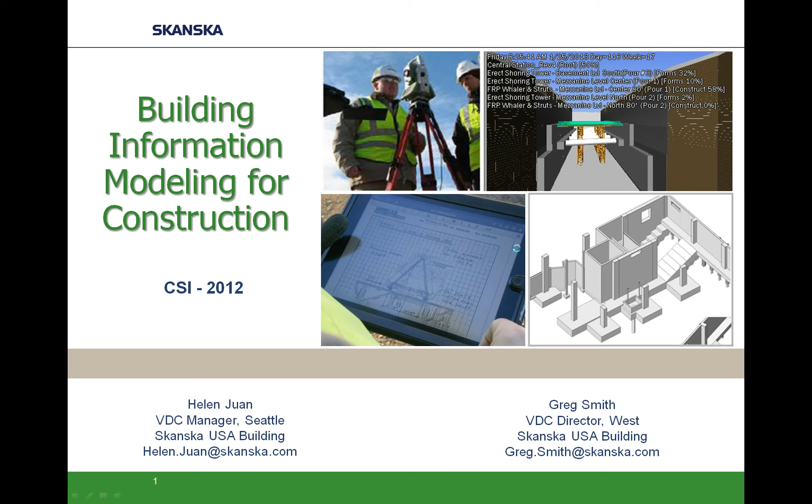Skanska USA is in a variety of different markets, including healthcare, aviation, institutions like universities. We do a lot of small and large construction projects. In the USA, we have about 5,000 employees. Worldwide, Skanska has about 55,000 employees. One of the big challenges for Skanska related to BIM is making it ubiquitous across the entire country, rather than just having pockets of excellence in certain offices. Next slide, please.

In this presentation, there's about 60 slides, other than the agenda, and we'll try to go through those as rapidly as possible and get to any questions. So this is the agenda. We're going to talk a little bit about planning and construction, and then the information as well. One of the lowest hanging fruits for BIM, for us anyway, is visual communication. We do logistics planning on every one of our projects. The more we can communicate in 3D, it just helps the entire team see what's going on in the construction project, rather than trying to flip through 2D documents. So next slide.

This is another example of 3D logistics plans. Looking at that is a great visual communication of what's going to happen on the project. And we don't just share this with our internal team - we can share this with the owner, and we can also share it on a website or some other way so that the public can see what's happening as well. So next slide.

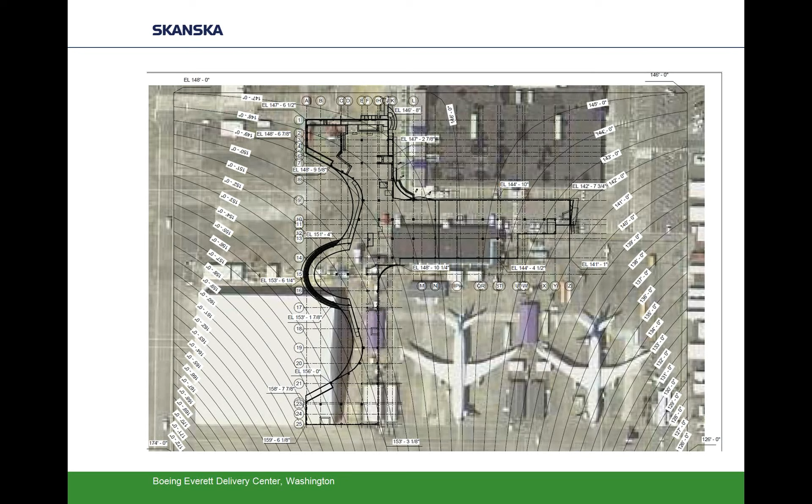In this example, this is a unique case where we had an FAA ceiling. This is the Boeing Everett Delivery Center for the 787, and they were only given 4 points of elevation at the 4 corners of the site. So trying to communicate the maximum crane height operating limits was conveyed through this contour map, but we also showed the ceiling in this elevation view, so they had an idea that it was a plane twisted in 2 directions.

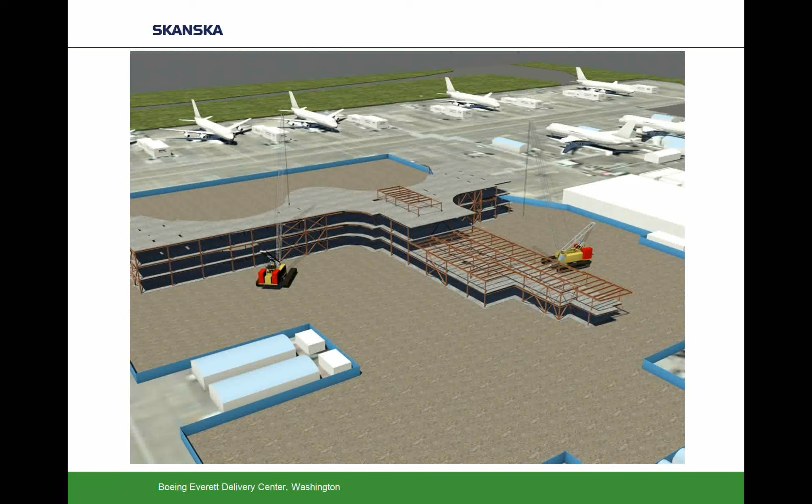We also use the models a lot for virtual mock-ups. In that same project, we were showing how we were going to execute this project from 2 different sides. It was a fast-track project, showing where the FOD barriers were, the crane locations, and how the sequencing would go with the steel and the concrete.

Go ahead. Sure, go ahead. I was just going to say, you can click to show the next thing.

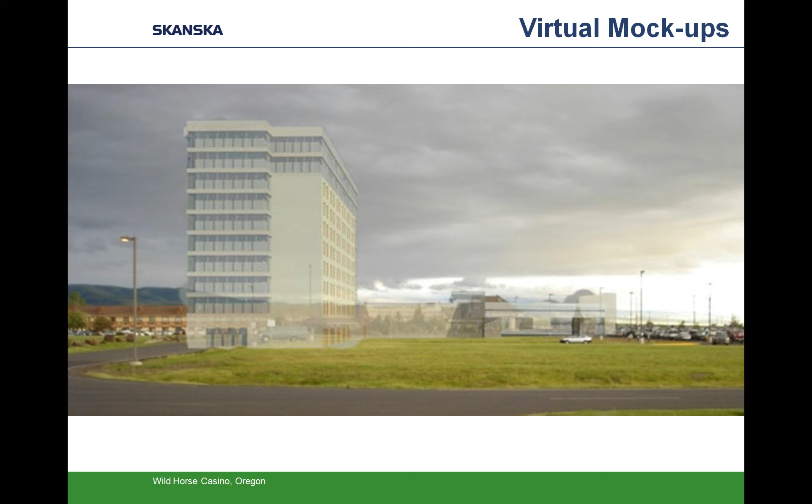Go ahead, Helen, next slide. Here's an example of where you see, on the left upper corner, there's a 2D plan.

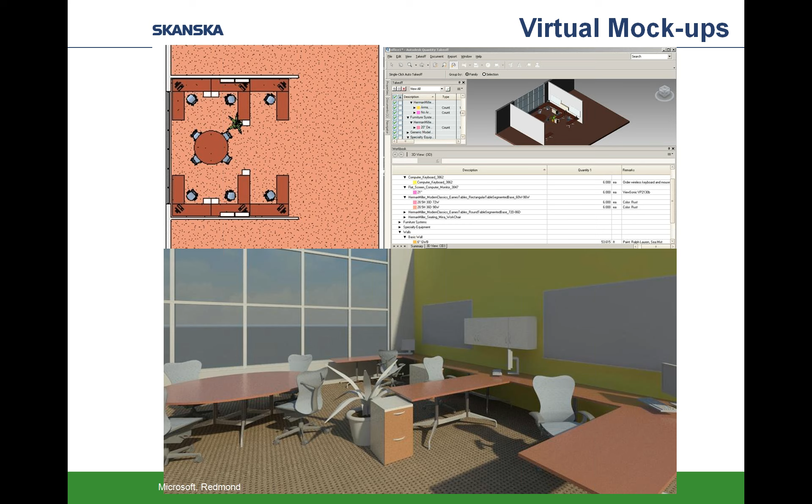Okay, there's a 2D plan of the furniture, but it doesn't really give you a good idea of what the layout is from a user's perspective. So below is the 3D representation, and we also use this for a lot of our healthcare facilities. When we're mocking up the interior for patient rooms, there's a lot of valuable space in the walls, and the doctors and nurses have very particular needs for how all their in-wall equipment is located.

Here's another example of a healthcare facility with the patient beds layout and the scanner. We could add even colors and textures to it, so the staff completely have a good idea of what's going in and what they'll be receiving from the facility.

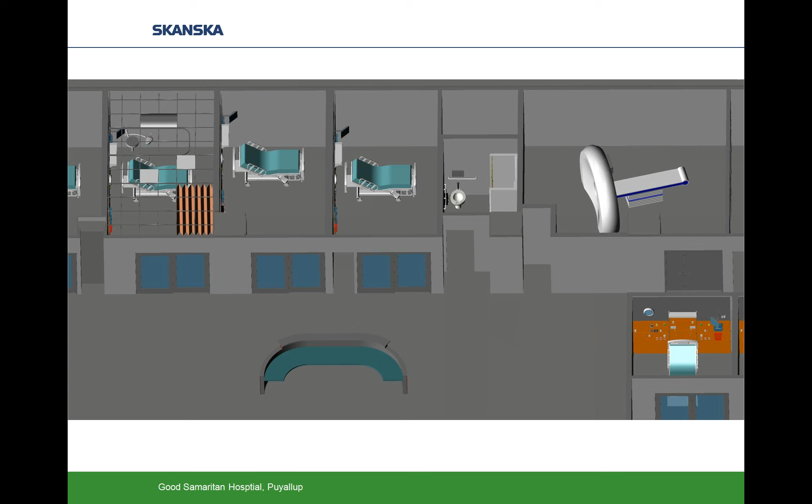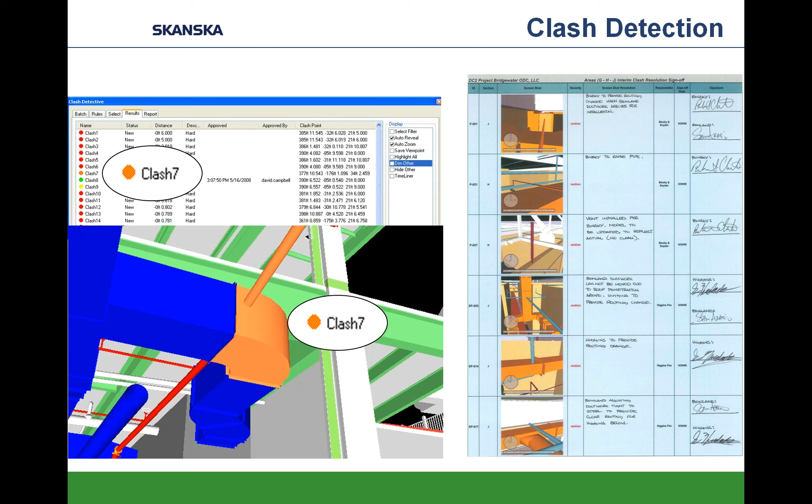Here's an example of a coordinated view with consolidated models, and then an in-progress construction view. We try to take the model on field computers or iPads and use that as a quality assurance type of tool, actually walking the systems and making sure that what was coordinated is what's actually put into place.

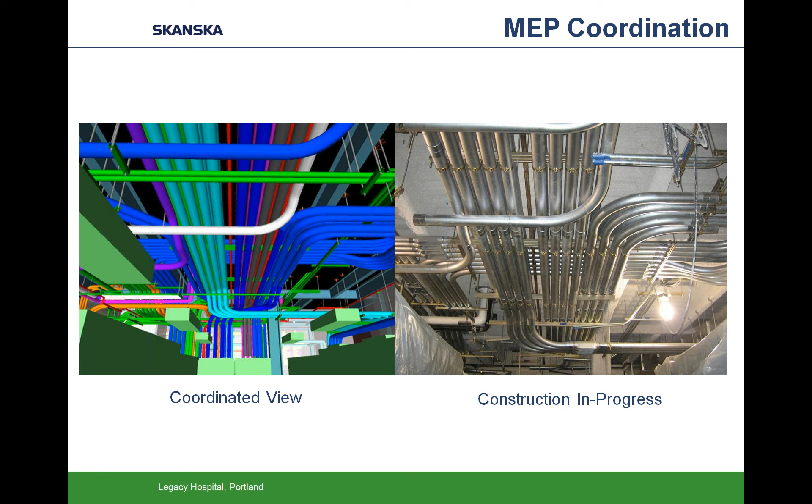In this example, this was a model that we created in preconstruction for the University of Washington Medical Center. There's a lot of existing utilities, and in this model we communicated how the areas of influence from trenching for the new lines and pouring the new piles was going to affect the existing structure.

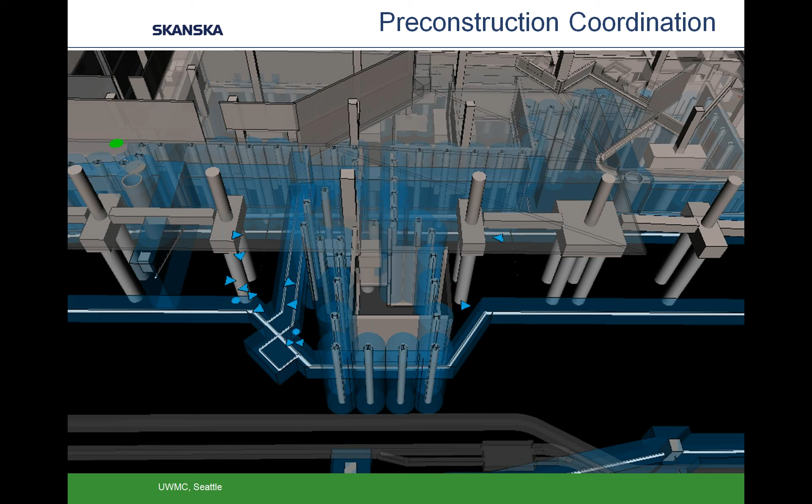Greg, do you have any more insight on this one? I know you worked extensively after I modeled this. Yeah, it was just a good example of where the designers were kind of working in silos, and until we brought it all into a model and showed them how the foundation information was going to clash with the utilities, it really sparked a lot of discussion, and we were able to resolve a lot of things early in the process.

I'll take this slide as well, Helen. This is actually off one of the projects we did several years ago, and nobody at the time wanted to do MEP coordination.

If you look at the drawings, it looks fine in plan view, but in elevation view you can see the equipment is sitting outside the roof. This wasn't caught until we started trying to install the equipment, and everybody realized there was a problem. It would have cost a very minimal amount of money to do the MEP coordination up front, although nobody wanted to do it. But in the end, it jeopardized the schedule and cost quite a bit for the change.

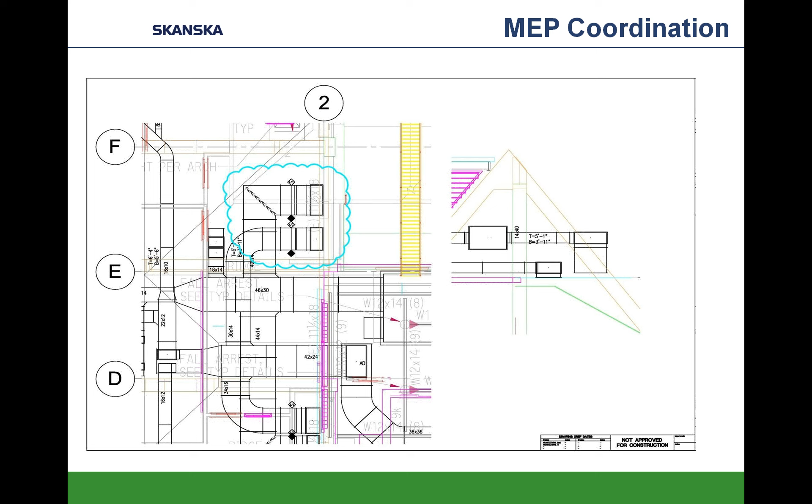Next slide. We also use BIM for safety planning, and in this example we're pointing out some of the temporary structures that were put into place for safety measures—railings and fencings. Sometimes we'll highlight leading edge where there's going to be hot work above.

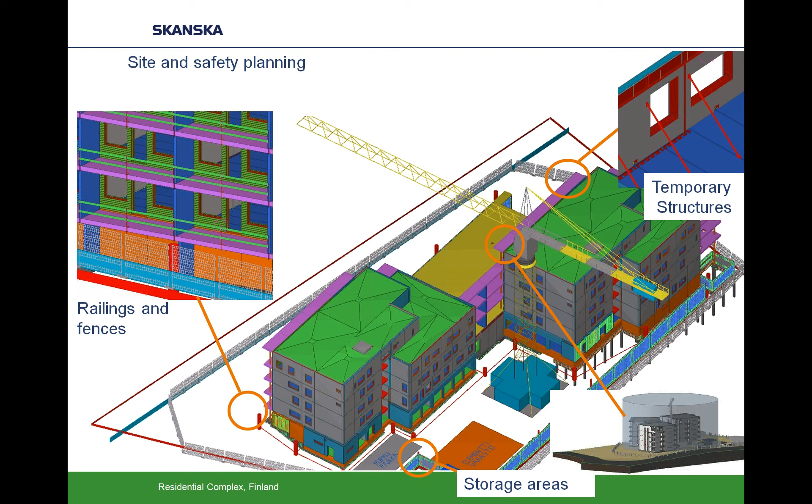So the model could be used in a variety of ways, depending on who's your audience. We tend to sometimes forget about those temporary structures, but they really have a huge importance during the progress of construction. We've gotten into a habit now of creating a schedule of the plans and lift drawings that we intend to create from the models, so that we can stay ahead of the work and stay ahead of any safety concerns.

The models could really be used for ensuring safety throughout the life cycle of a project. As you see from this picture, there's many valves in the structure that aren't accessible except through a scissor lift, whereas you could have easily designed a catwalk to access all this equipment. Over the course of the lifetime of a project, consider the cost of the hazards you're imposing on personnel, the time lost just obtaining the scissor lift and putting it in the right place. There are productivity efficiencies there, versus a one-time install of some permanent infrastructure that can safely allow maintainers to access all the systems.

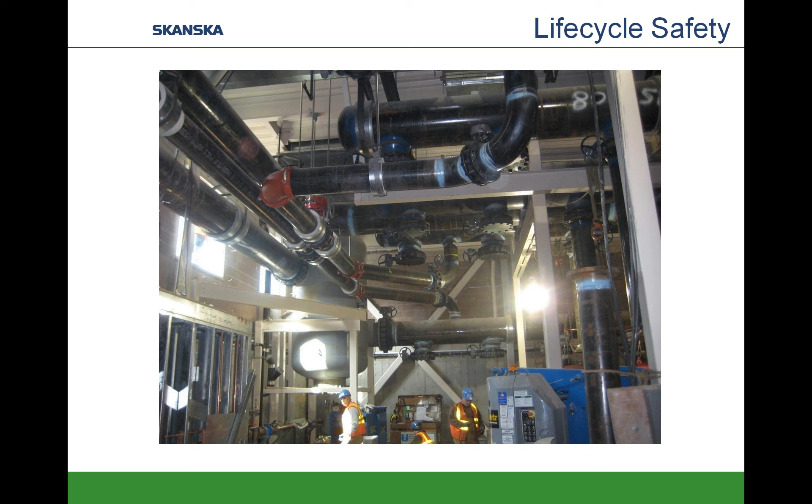So a big part of lifecycle safety isn't just making it safe to construct, but making it safe to operate as well.

We have some techniques by having superintendents work with the model, and they're able to think of ways where there's safer means and methods of construction. On the Good Samaritan project, we're looking at the embeds in some beams. The floor to floor height is 15 or 20 feet, so there's a lot of interstitial space.

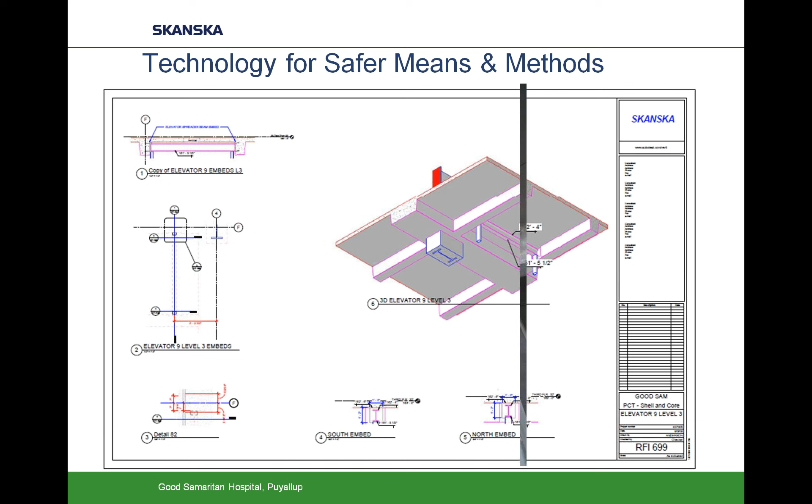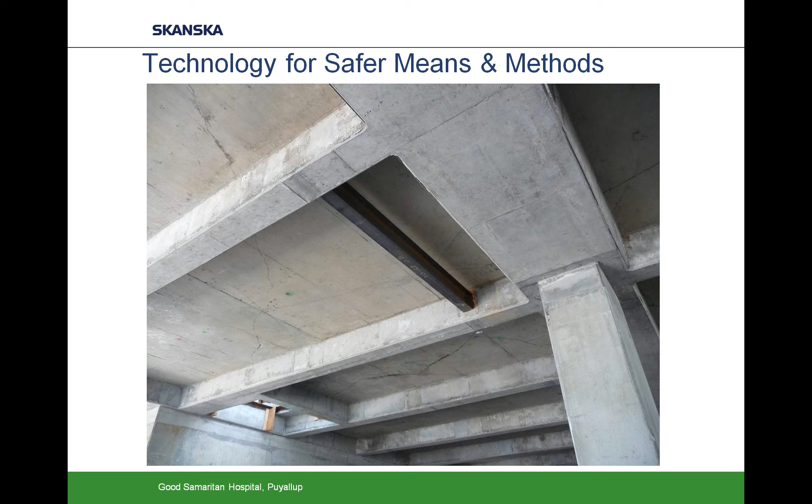Working with the superintendents, they're able to tell us what methods we could use to install the embeds at the floor level before we cast the beams, and then raise it all up. In this example, we really saved time for the steel workers and also improved safety by having that beam welded to the embed prior to it being lifted into place and the concrete poured.

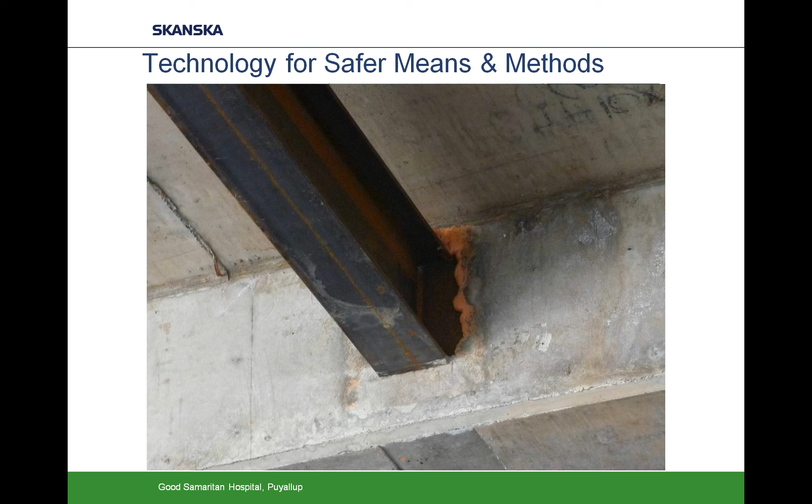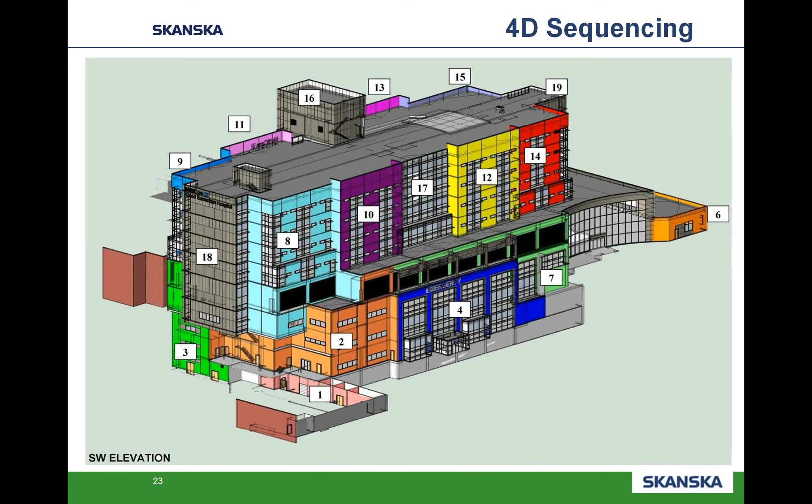I'm sure a lot of people have probably seen a 4D simulation, but it's just tying the schedule to the elements within the model and then creating a little movie. Go ahead, next slide.

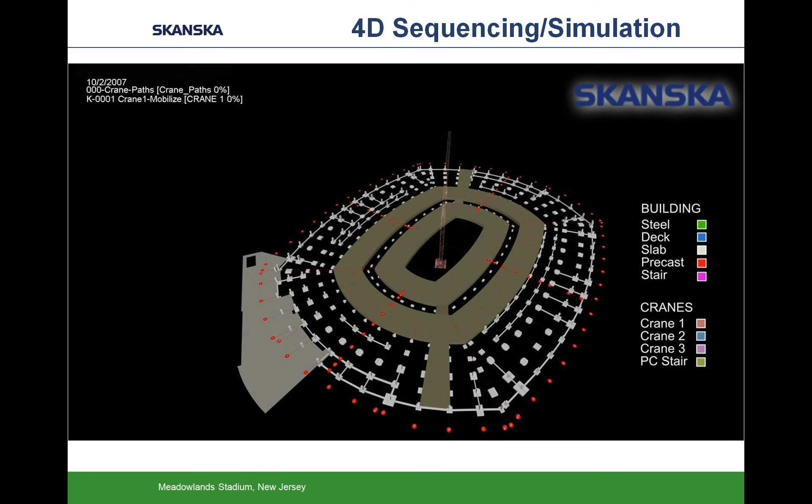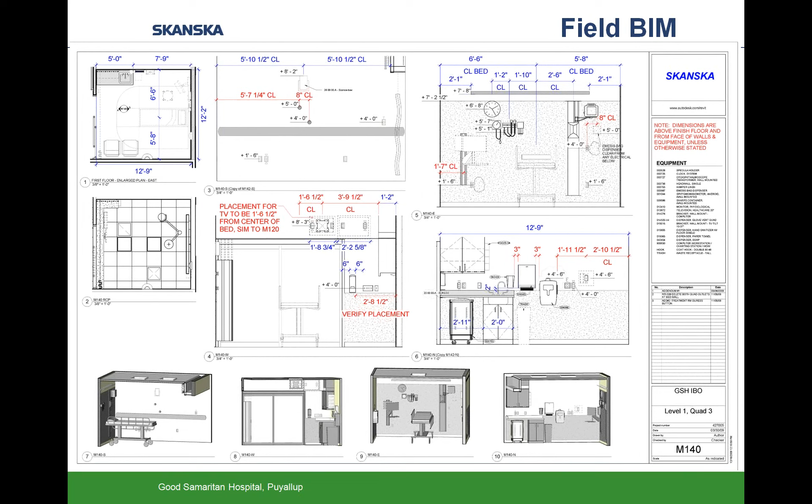This gave views from the ceiling, floor, each of the walls, and then isometric views for each of the patient rooms.

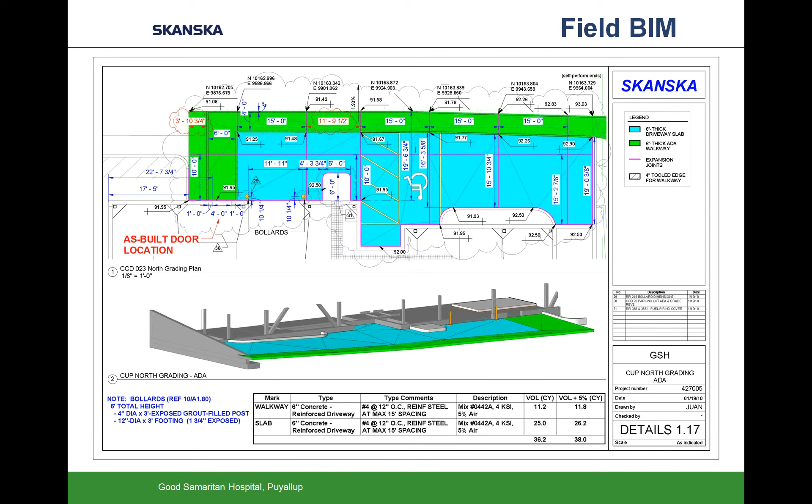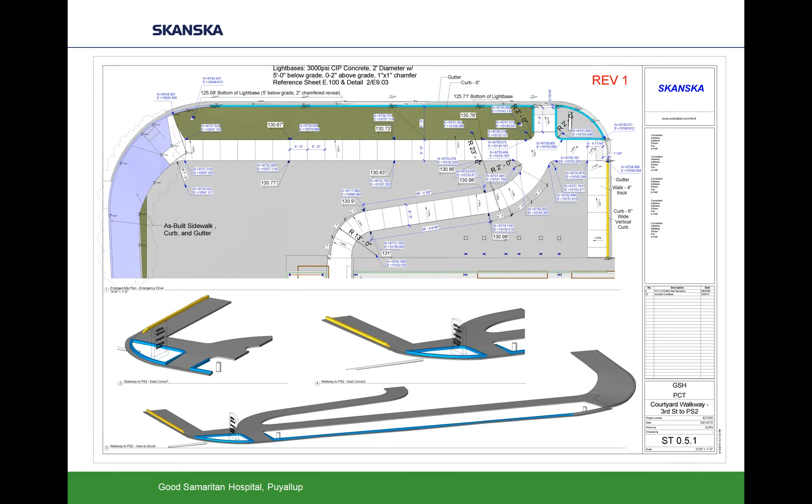This is just an output from the software, so that we can take a robotic layout and easily shoot it in.

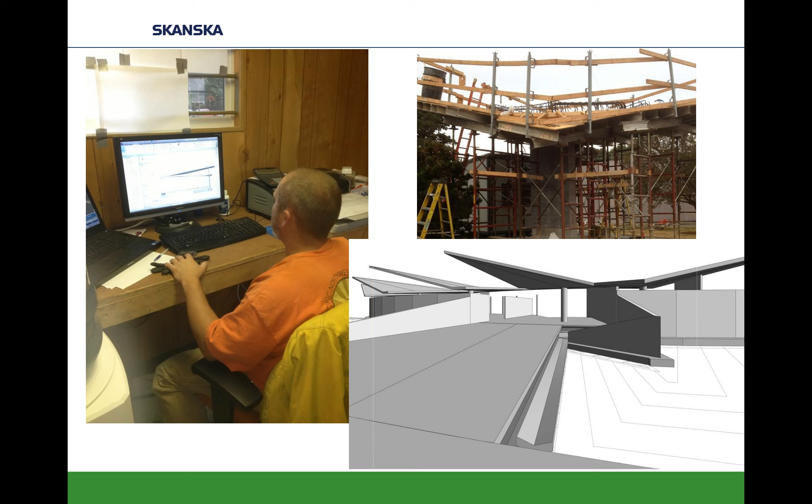When we got the drawings from the engineer, they did not show the rebar bent at all—it was shown bent at a 90-degree angle, but based on the slope of the roof, we had to bend the rebar in a certain fashion. It's hard to see in the picture, but some of those bars are painted, which helped the field guys orient those columns properly, so that when we pour the roof deck, the rebar isn't sticking out.

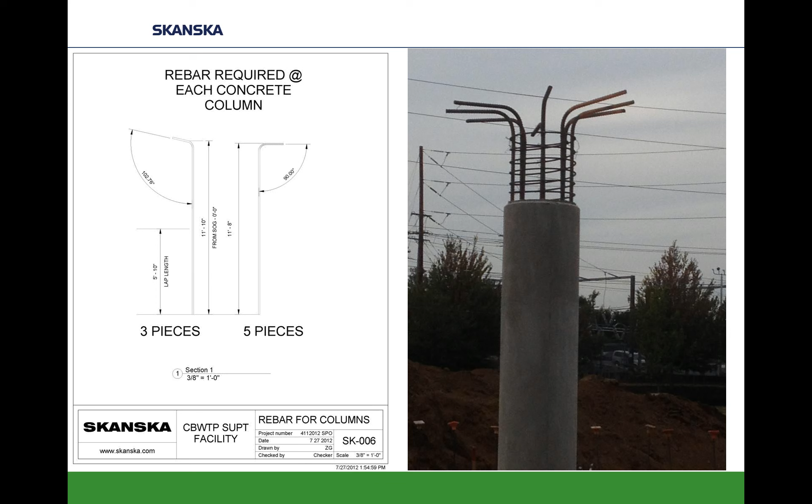Zeke, the superintendent, is very self-sufficient on this project. He's building the model, adding points to it, and then extracting those points to use in a robotic total station to lay out the site.

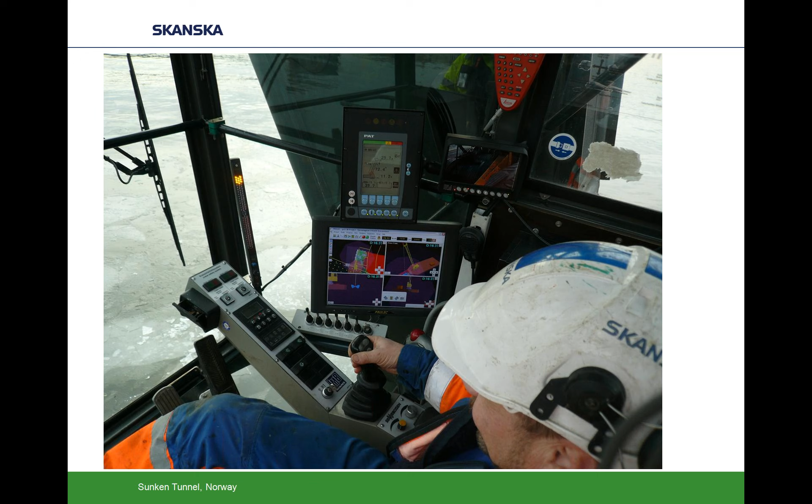This is a bit of a different view—this is actually an excavator, excavating the bottom of a bay. This picture shows the inside of the cab, and the guy is basically playing a video game all day long, watching on his screen how the digger is excavating. So the kids playing video games these days are going to end up being great construction workers.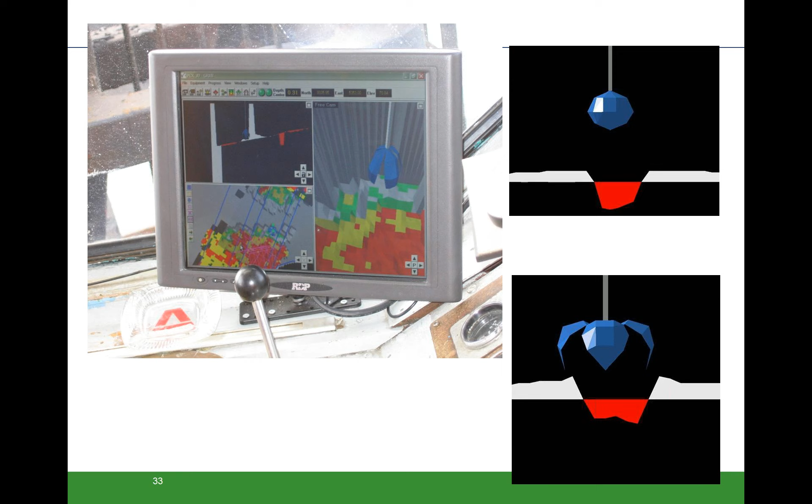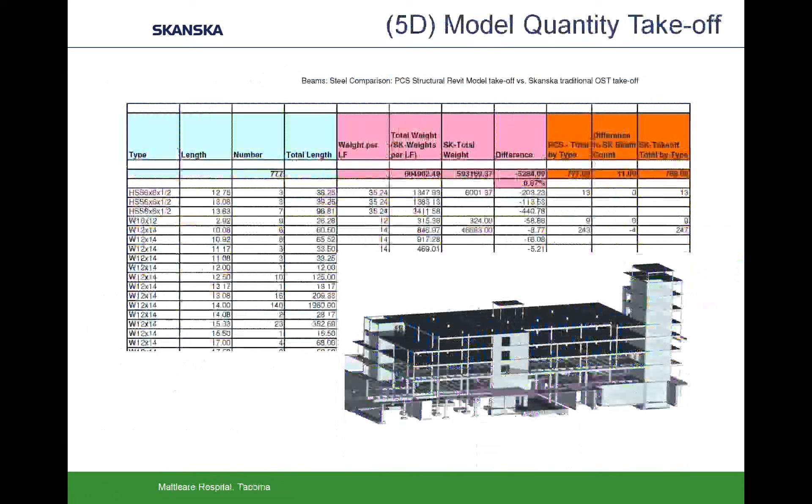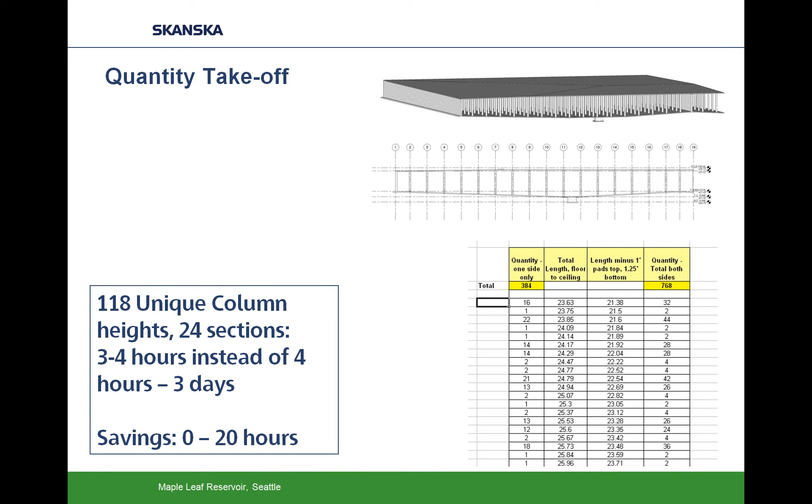We can also use it not just for quantity takeoff, but to figure out how to construct projects. In this example, there were 118 different unique columns, all with very different heights. It's hard to see in this model image, but the roof is sloping in multiple directions, as is the floor slab—this is for a reservoir in Seattle. Our estimators would normally just take one column and average the height across all the different columns, but we were able to build a model very quickly and develop a more accurate estimate.

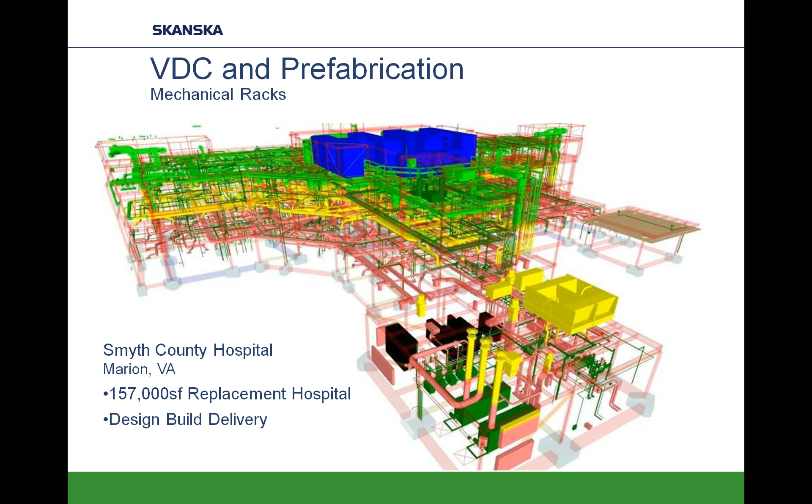So what we start out with is we take a floor plan, and this is for mechanical and electrical racks. We lay out the racks in the corridors to plan where those racks are going to be.

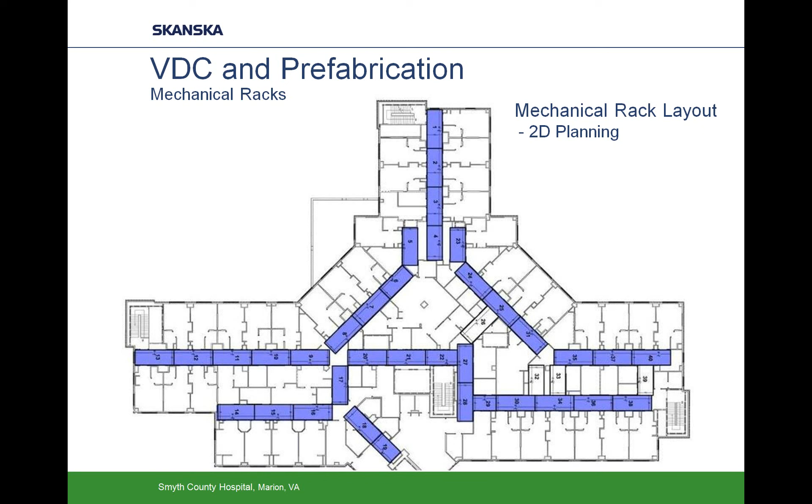This shows how those mechanical racks are going to be laid out. This is after our MEP coordination is done, and we lay out those racks.

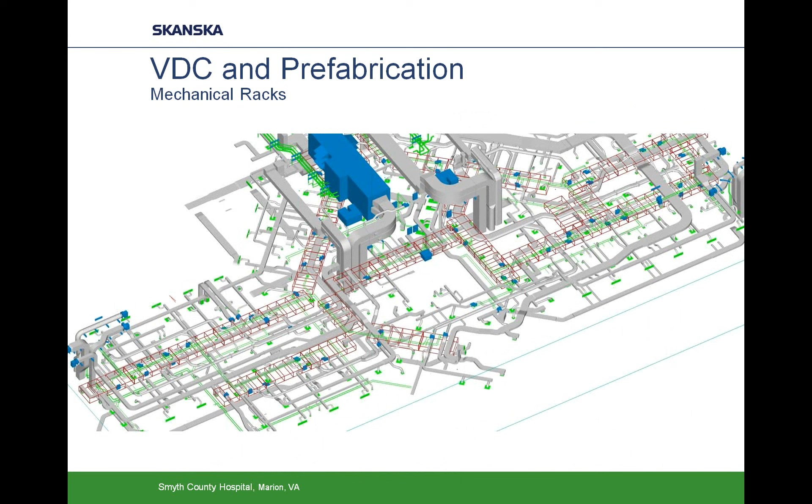One of the things people think about with prefabrication is identical parts. What we do is focus on not just identical parts, but parts that we can identify and detail out to build in a warehouse environment. So we can focus on one of these racks.

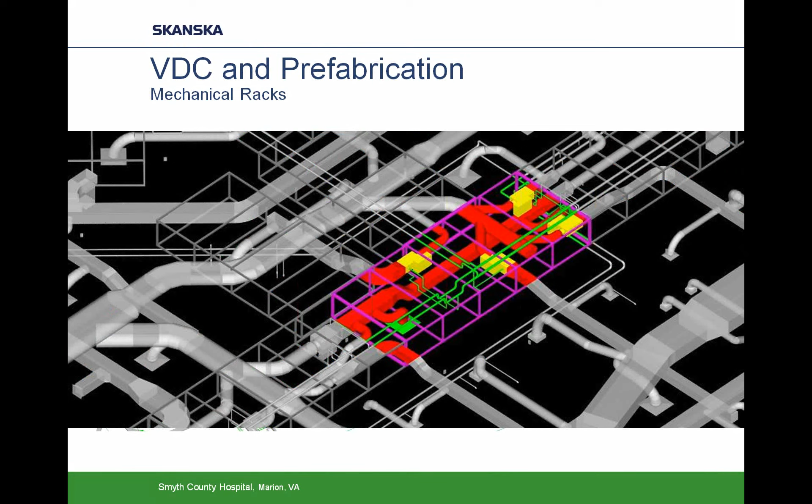We can detail out just that rack, and the models are parametric, so if we change the size of the duct, it's going to change it in our shop drawings as well. If we move something around, it's going to change it in our shop drawings.

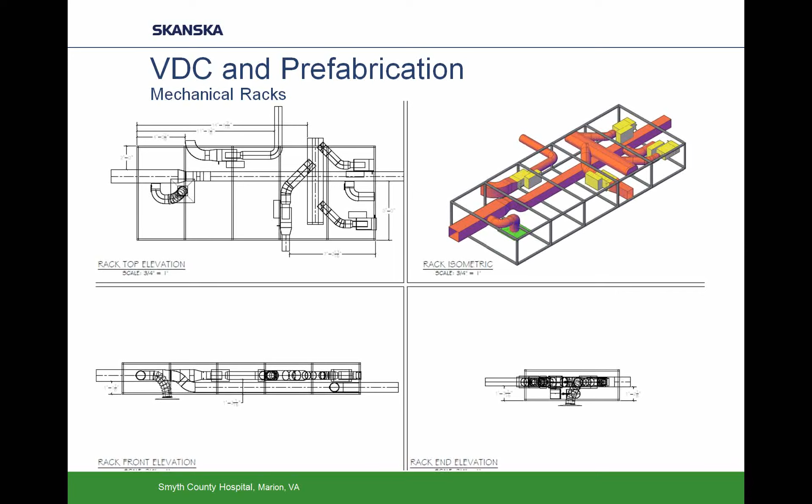This shows the rack after it's been built. One of the things with prefabrication, it really speeds up the schedule, and it also makes it a much safer site. You don't have nearly as many people on site.

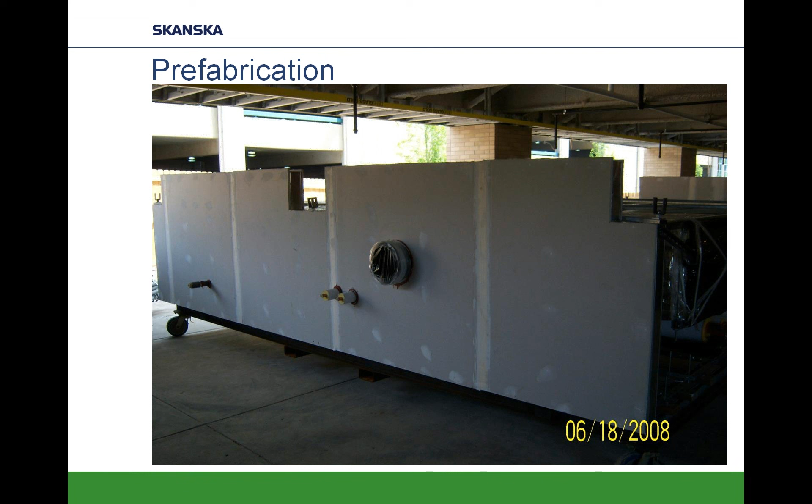Like in this example here, we can attach the partition to the rack before we install it. There's an animation showing this.

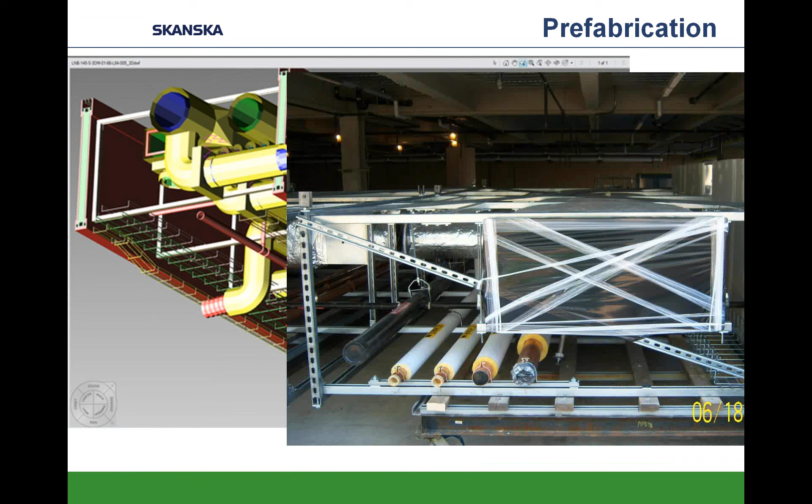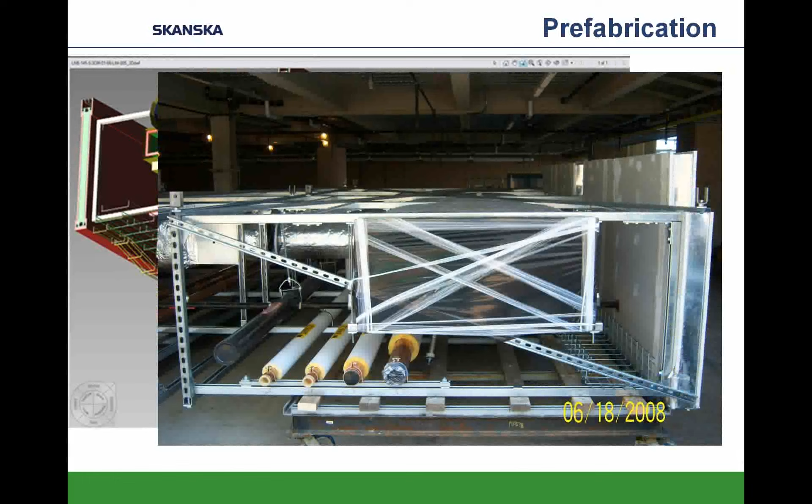That's again showing a detailed model and then how it's being constructed, and then how it's installed. So we wheel the rack into the site, and then we just hoist it up and install it on these tracks on the ceiling. It's a pretty much fully contained unit.

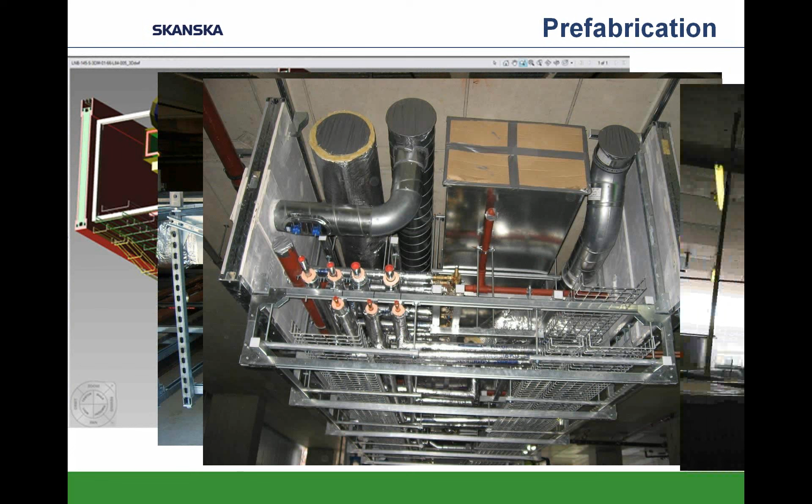And that's showing an entire row of those racks being installed.

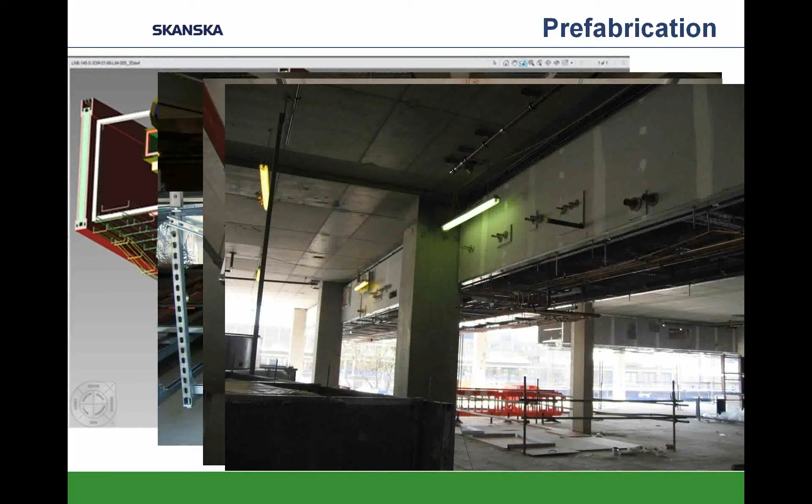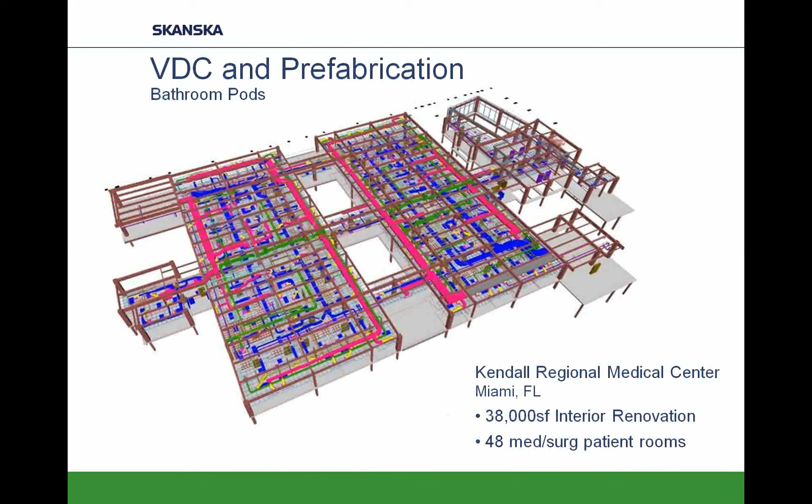This is another project, Kendall Regional Medical Center in Florida, and we prefabricate bathroom pods instead of the mechanical racks.

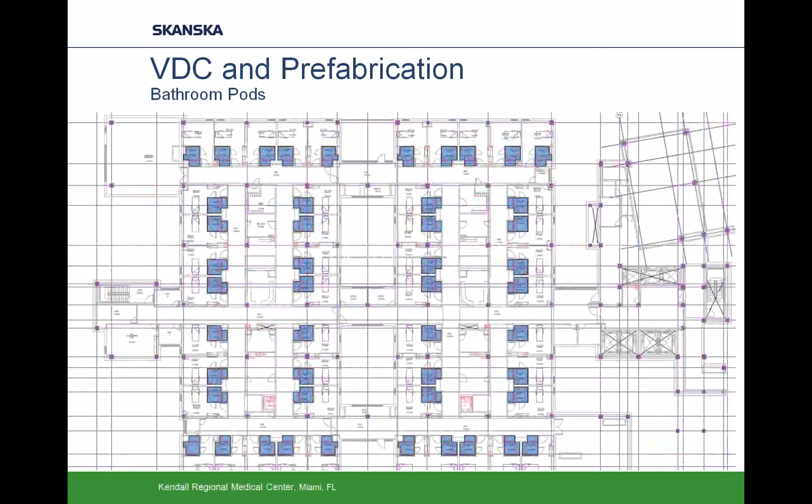So again, we lay out those bathroom pods, and in this example, the pods are fairly similar. Where the mechanical racks are all different, these are mostly similar.

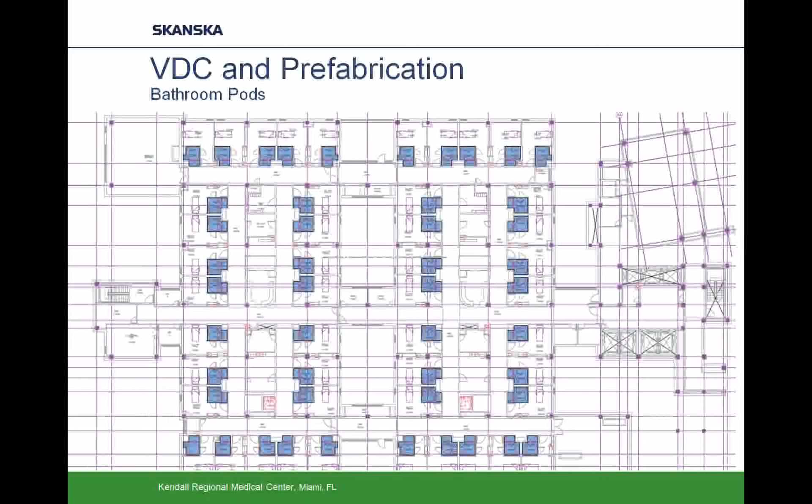We can show, down to the studs and all the mechanical and electrical equipment. We detail it out in 3D.

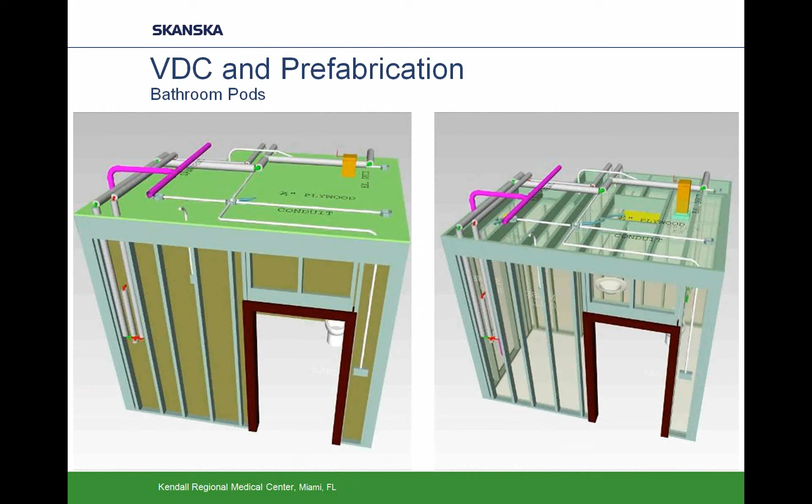And showing those 3D bathroom pods again on the floor plan and in a model.

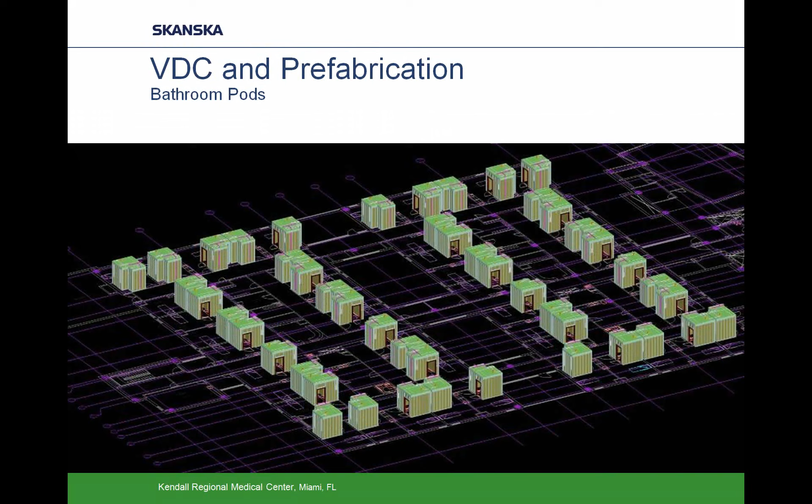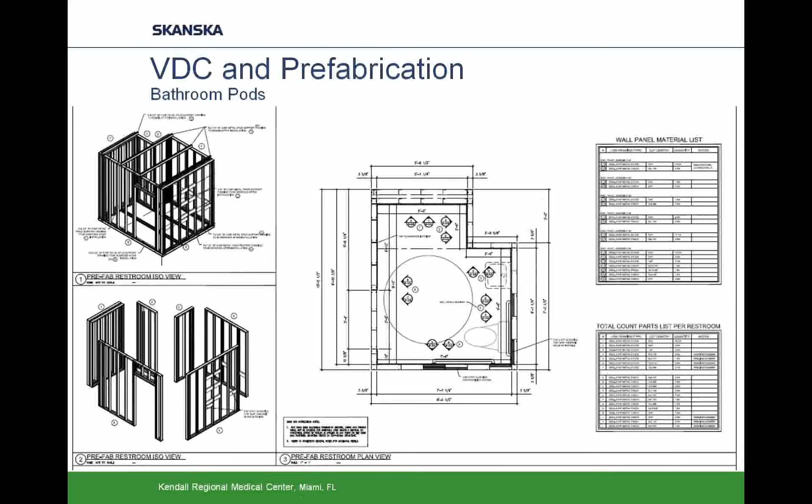Here's where we develop the models into shop drawings and bill of materials. There's animation that shows the bill of materials. We can break the models down into separate parts and shop drawings to send to the warehouse to build. It develops a bill of materials for you as well.

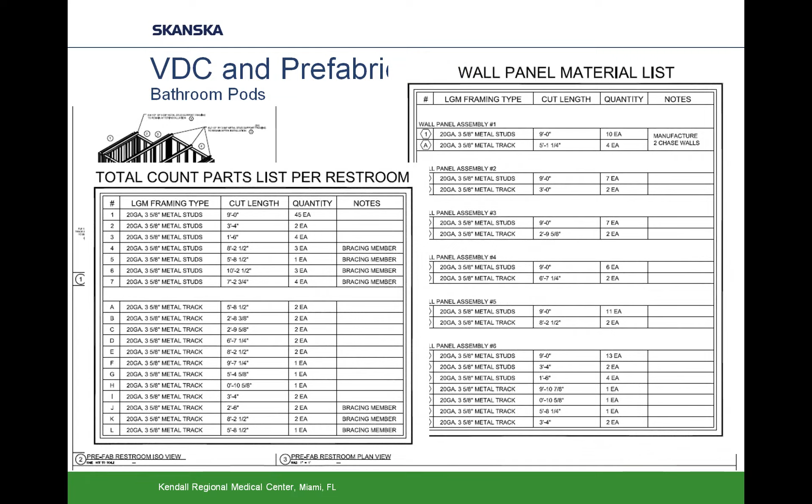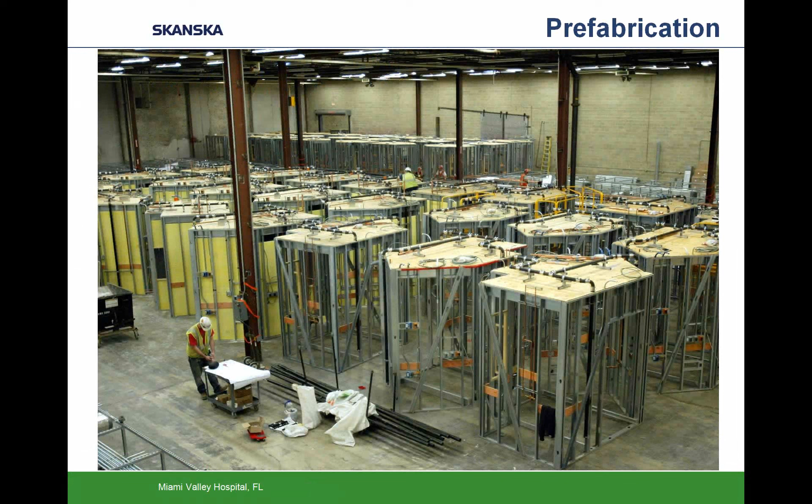Once we get them to the job site, we can fly them in with a crane into the appropriate floor and install them from there.

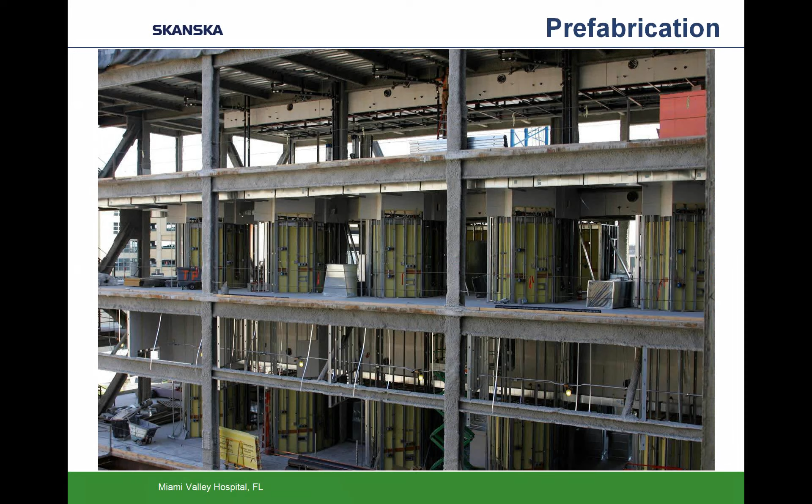A big part of constructing something correctly is ensuring everyone has the correct information. A lot of the traditional method is that you get red lines, you mark up those on hard copies, and everyone copies those red lines. You hope that all the subcontractors have caught that as well.

But something we've implemented for about 5 years now is the electronic version of that. So we redline PDFs and create hyperlinks so that anyone in the field will then be able to access those changes through what we call our digital resource stations.

This is the first generation of it, where it's just a large screen and one of those flexible keyboards that was used so it wouldn't be affected by the dust. We had this on every other floor for our project, so that if you needed to get to information, you could just print it off right there in the field instead of having to go trek back over to the construction trailer and review the record set.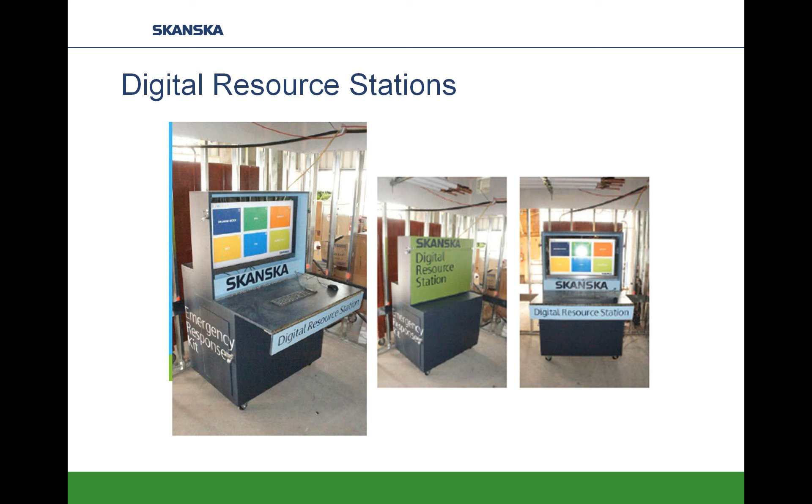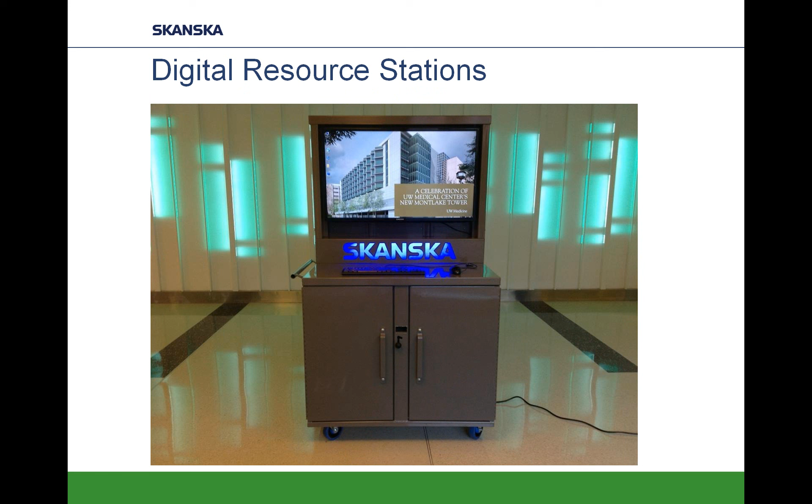After that, we created yet another version, until finally now we have a nicely fabricated digital resource station that's good for both indoor and outdoor use, and it's highly portable. And it fits through a door. Yes, it's an important part.

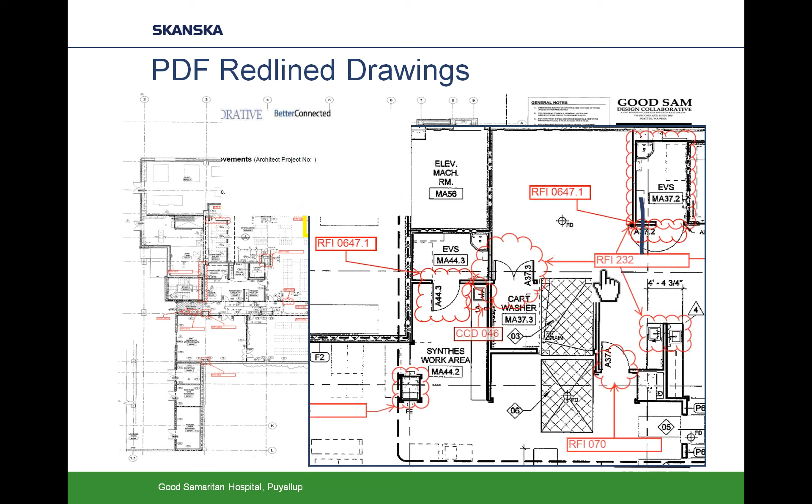Here's a close-up of our PDF redline drawings. All of those boxes are hyperlinked to RFIs, DCNs, ASIs. Let the animation catch up here. And it's as simple as that. You don't have to reference the drawings and then go to a binder from the traditional methods.

One of the newest things we're doing is taking the information out to the field. We have digital resource stations in the field on multiple floors in different projects. But the newer technology like iPads, we're using more and more every day, and it's a lot of the same information that's on the digital resource stations. It's the exact same information. It's just that now our superintendents can walk out in the field, and instead of having a roll of drawings, they have all the most current information at their fingertips.

We also barcode equipment and different aspects of the project. We've used tablet PCs and other software to catalog some of that equipment and use it for quality control and things like that.

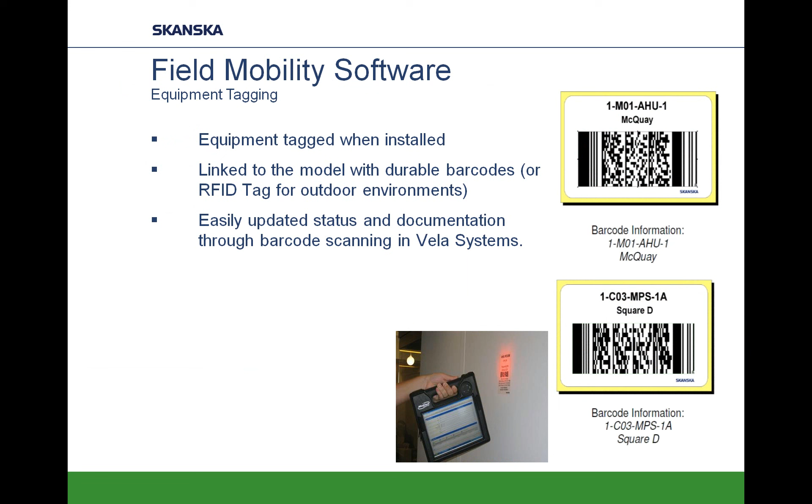We've also used it for supply chain management as well. So you can click on one of those barcodes and see when it's been installed. You can see a piece of equipment if it's been received on site, or the status of that equipment.

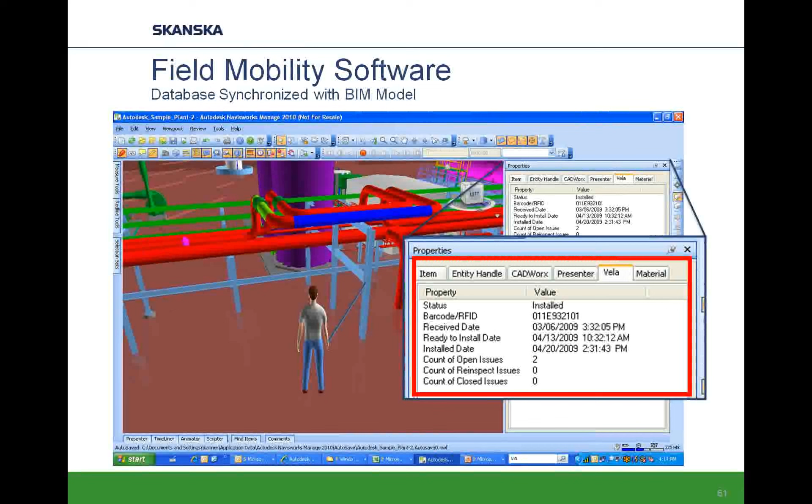This is the Meadowlands Stadium in New Jersey. We were using RFID tags, radio frequency identification tags, and scanning the precast concrete seats. They would be scanned at the manufacturer when they were constructed, scanned again when they were on the truck ready to be shipped, scanned on site when they arrived, and then scanned again when they were installed. So using a database software, we were able to see the status of that piece of precast.

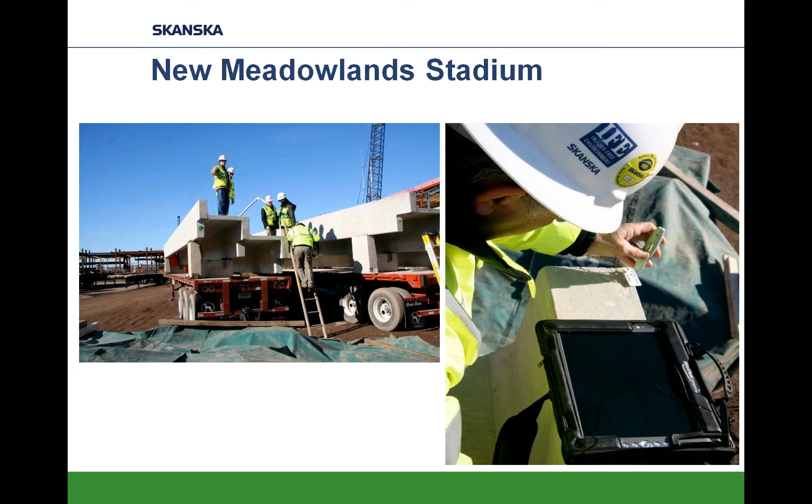This just shows what the RFID tag looks like, the reader, and then the software, and how we were able to use the software.

What was also important about this project is that you would think a lot of the precast would be standard, but it wasn't. There were a lot of unique angles for each of these pieces, so it was very important to keep track of each piece, because you couldn't just put in the next piece. It was very much a puzzle instead of just a standard cut for all of them.

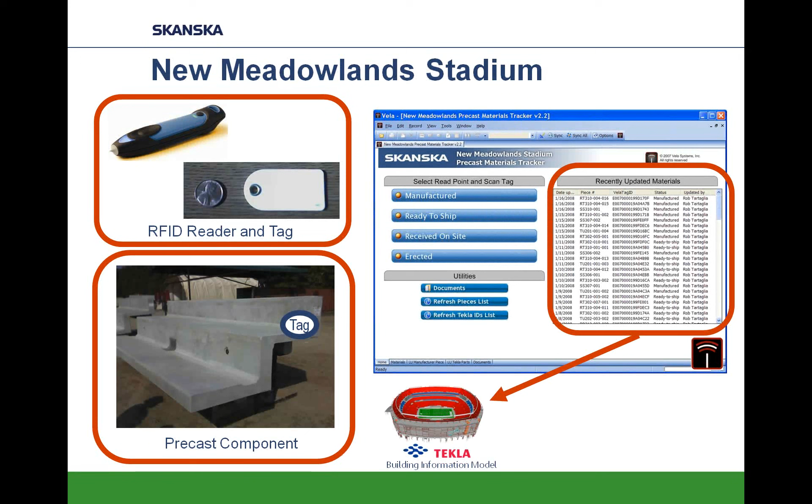I was trying to look at there's a question, and I was trying to read that. I'll read that in just a second.

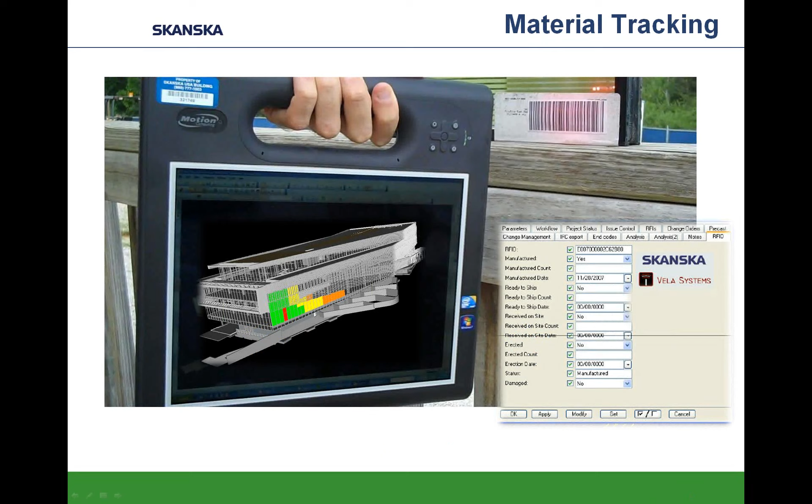We also use this on the Hunt Library project back east. We use the same material tracking methodology on curtain wall panels. Most of them were unique panels, so we were able to track when they were manufactured, when they were shipped, when they arrived on site, and the status of when they were installed. The different colors represent the status of that piece of curtain wall.

So the question: no chat box on iPad app. How do you get your subs on board with using BIM? For example, the CT scanner MRI example you showed does not look like the actual model that would be provided by the MRI shield vendor. It looked more like a generic layout provided by the architect.

Well, fortunately for us in the Northwest, mainly on the West Coast, our subs are very BIM savvy. But we do have documents that we use for bidding and for contracting, MEP BIM coordination and specification guidelines. So we write it into the contract with the subs to get them on board.

In that case with the CT scanner, we had to take, because we didn't have the model and the owner didn't want to pay for the model from the manufacturer, the shop drawings and generate the geometries as close as we could ourselves. There are a lot of manufacturers, especially for high-end equipment like that, who have their own models, but at the time they were charging like $500 for that model. So by making our own CT scanner model and using that, we were still able to communicate the idea to the owner.

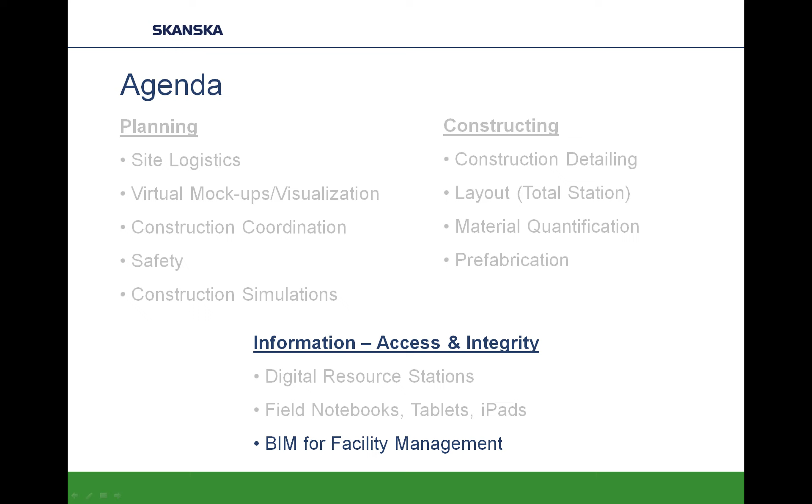One of the things with BIM is it's a very iterative process. Early in conceptual design, the models we get from designers probably don't have a lot of information, and we add information along the way. By construction, subs are detailing out their scope in BIM. For example, a structural steel model from a designer will have columns and beams, but working with the steel fabricator, it'll have gusset plates, connections, all of that in their model. We can use that model rather than the structural design model for construction and MEP coordination.

I hope that's answered the question. Next slide.

So, Helen, are you going to talk about this? Oh, no, I guess I am. I lost the screen that shows what you guys are seeing. Okay, so I'm kind of operating blind here right now.

We've also used BIM for facilities management, basically a facilities management handover to the client. What we do is take things like O&M manuals, equipment schedules, warranty information, training videos, and project photos, and associate those with the models.

On this project we used a product called Artra. You can see the pane when you click on an object—the blue object in the model has all those links attached to it, and you can click on one of those links and it'll open up whatever you're trying to find, whether it's the O&M manual or a training video.

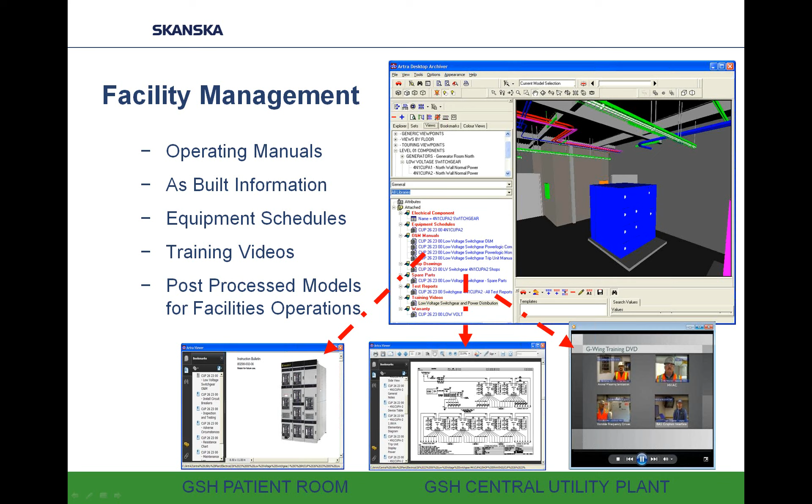When we export from a model, any information embedded in that model—all the attributes for those components—is brought into this platform as well. This platform uses Navisworks, so it wasn't just what we manually connected from the O&Ms to the model, but also valuable information already embedded through the software. If you have specifications attached, or hyperlinks within Revit, that information was not lost—it was also transferred into this O&M facility management model.

We also build data centers, and one of the things with data centers is we save them money on energy—it saves millions of dollars. We use the BIM model, or 3D models, and link that to the equipment, monitoring the status of that equipment over time.

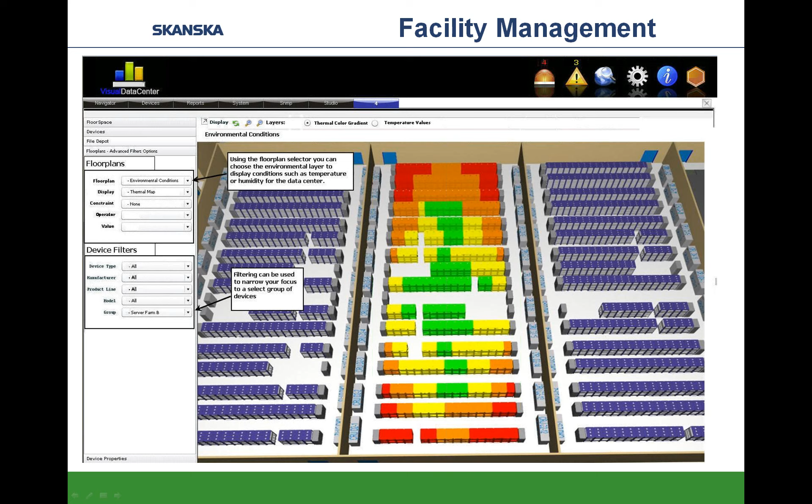Next slide. Did it? Oh yeah, okay.

When we're working with owners who want a BIM-enhanced facility management tool, we ask what are the things they're looking for the tool to do. There's a big variety—are they looking to increase energy efficiency, like in data centers? Do they want it to integrate with their work order system and streamline preventative maintenance plans? There's also just managing their spaces and leasing.

They want the BIM to be a sort of portal for all users to visualize the space and even send emails through it. So if they wanted to move from one room to another, they could get an estimation of the wall space and what kind of cost is associated with that move to make the space work for them.

And of course retrofits, renovations, and new construction—the models we deliver are as-built, intended for future planning of work. Finally, there's overall life cycle management of the building, so asset management: they can plan well ahead for when things need replacement, and plan for new equipment coming in, what that will cost, whether it can even be brought into the building, or if they'd have to open up a wall to bring in a large generator.

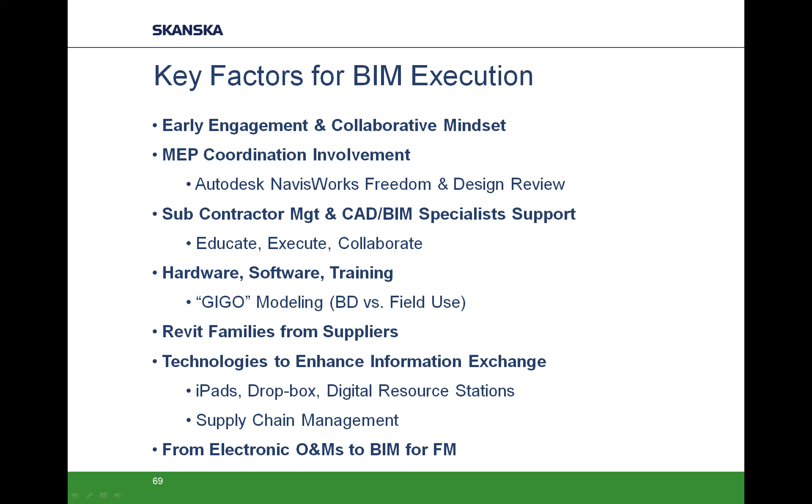So the question is, has Skanska documented standards for BIM execution with designers? In other words, how can designers contribute to this process?

We have, and probably the biggest thing we can do is sit down as a team at the beginning of the project with a BIM execution plan, and sit down with a model responsibility matrix and determine what the designer is going to do and what we need the model to look like for us.

One of the things I caution everyone about is designers create design models, and we create construction models. So to set expectations, it's not that we're going to get a construction-ready model from a designer. The designer takes it to a certain point, hands it off, and we take it from there. Like a structural model, for example - the structural engineer takes the model to a certain point, we take it from there and add the detail to make it constructible.

Any other questions or comments? And I have a quick question, Greg.

I've worked with many general contractors, including Skanska, and one of the questions I always ask from the spec writer's seat is, what's the best form that specs can be in to be used by this process? Is it attributes of components? I've never done that, but could. Is it PDFs? Is it something that can link into a software?

As long as it's in electronic form and there's a spec number we can associate with an element, we can link it to the model. There are tools out there, if we're using Revit as an example - and I'm not promoting any certain product - like BIM-link from Ideate. BIM-link can take an Excel file and link items in it to elements within the model. So you can extract all your different objects out of the model, update those in Excel, and put that right back into the model. I think there's other software that can link specs to elements in the model too, but we haven't played with that a whole lot. Being in electronic form really helps.